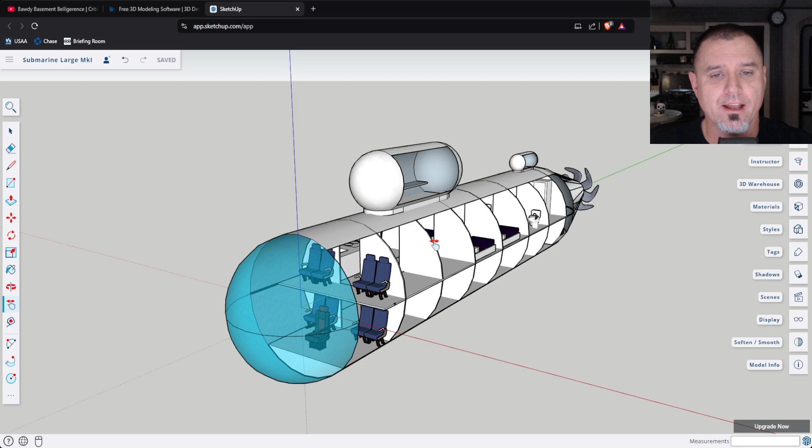Okay, so my OCD apparently needed at least one more crack at this submarine yacht thing before I could let it go, mostly because even the Mark II iteration that we went over in the last video has the problem of just not having enough width along the widest part, or even any part really, to make it to where you can walk up and down the length of the submarine without issues. The original version has a hallway along the side with rooms on that side, providing enough room for minimal cabins, but then you have this curving edge up here.

So I decided that rather than going with a 10-foot diameter pressure vessel, bumping it up to 15 would give me enough room to create a corridor going down the middle, and we'd be able to have enough room for some individual rooms here, and a captain's cabin towards the back. Increasing the diameter this way also increases the diameter that way, so now we have a 2-floor design rather than a single-floor design.

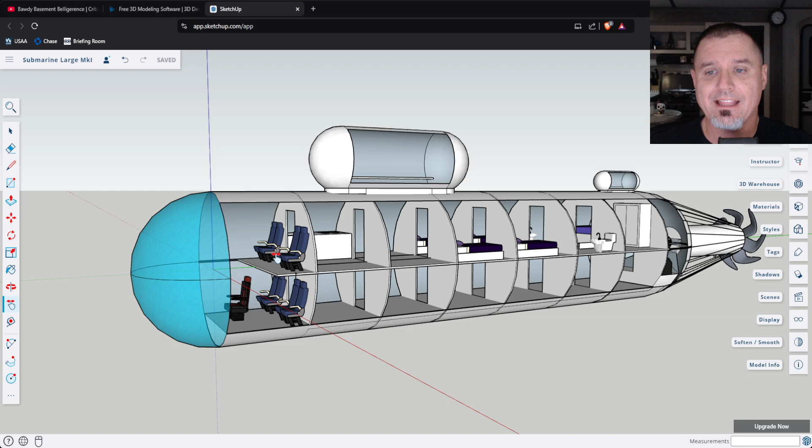The pilot would sit here so they have the best view to make sure they're driving and not hitting anything, and then plenty of seating back over here. Obviously if you wanted to put a couple small seats right here for people who want to sit up close towards the front to see everything, that'd be fine. Little kitchen area here.

I didn't go through trying to pay super attention to detail on things, I just wanted to give a better idea. You can see in the previous version a better idea of what I was going for in terms of attention to detail, especially when it came to systems and things like that.

So we have a kitchen right here, you'd have whatever you need in there. This would be a wet dry area where you come into and out of the sub from here. So this, you would have whatever storage you would need to be able to take things out of the sub and back into the sub, kind of things like that.

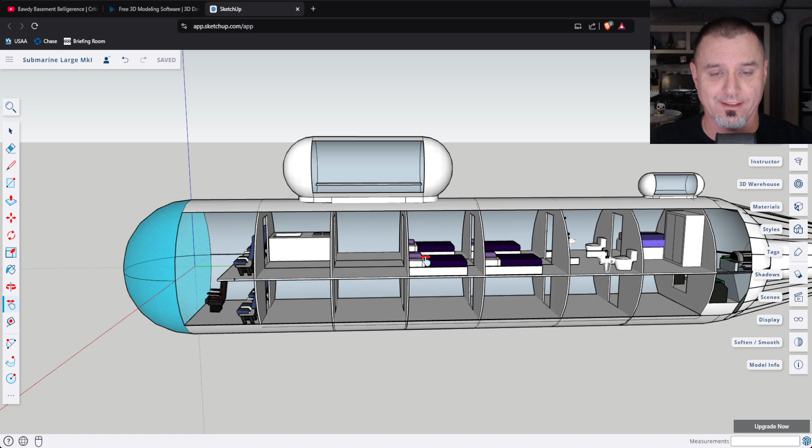For individual crew or kid bedrooms, or whatever - if you're running this as a yacht it would be family members' rooms, if you're running it as a research vessel it would be individual crew rooms. This right here is a dual bathroom setup.

These are meant to represent walls, they go up and over, and then there would be a door here. You'd be able to go to the bathroom, use a sink, use a shower. This could obviously be rearranged - this is just a quick little half-assed thing to give everybody an idea of what I'm going for. Obviously you want people to be able to walk through without disturbing people trying to use the bathroom and take a shower, so while I'd like to have one big shower, maybe you can make this all one big shower area and then have a couple stalls over here for the bathroom. You could figure it out if you were going to get serious about engineering something like this.

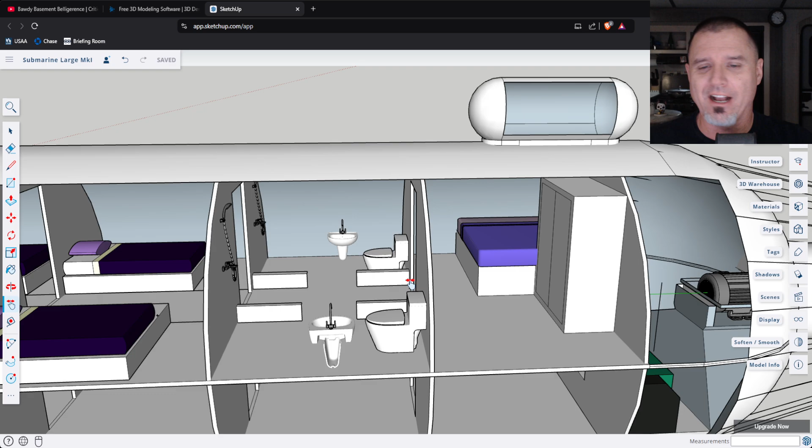This is just a quick little thing I put together to get the idea of what I have in my head here. Captain's bedroom with a queen-size bed, big storage cabinet - there'd probably be a bunch of other stuff in here that you'd be able to do.

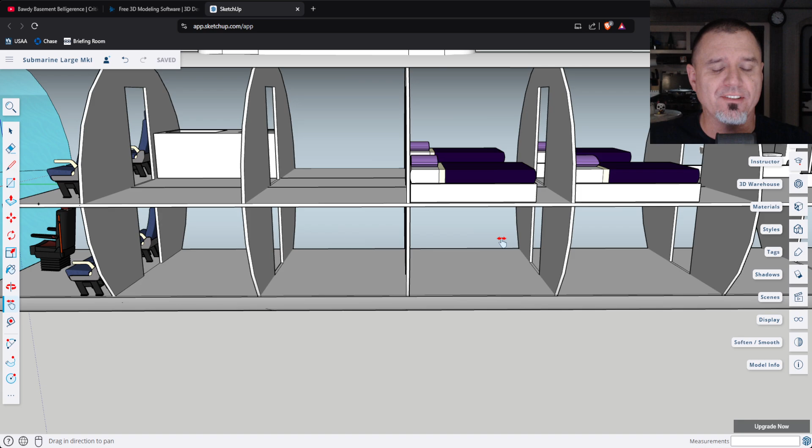All of the systems would be down in the very bottom of the submarine, and also up into this second level here, which would be mostly a mechanical area with all the different systems the sub would need - air handlers, ballast tanks, any pumps and stuff, batteries - lots and lots of battery storage, because you're going to need lots and lots of batteries for that.

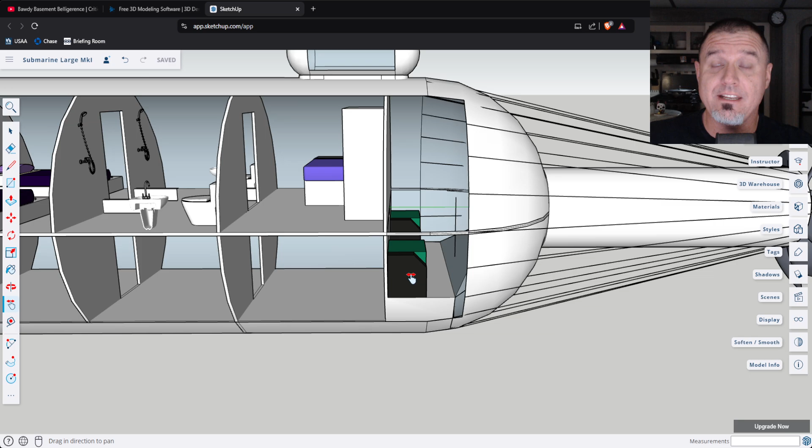Everything in this second level, it doesn't even have full standing headroom in here, so you wouldn't really want to be using the space too much anyway. You'd just have a lot of mechanical and other equipment that you might need for the sub - dual diesel generators to make power for the batteries and also to run the electric motor here.

For the gentleman who has an interest in this particular idea, this is what I wanted to have on the previous 2 iterations of this, but you can see it clips through the pressure vessel here. So that's why you were supposed to visualize that this was here, and that's why there was a flat wall there - because at the end of the sub, you need to have some kind of way to taper off the water flow so that it doesn't just stop right here.

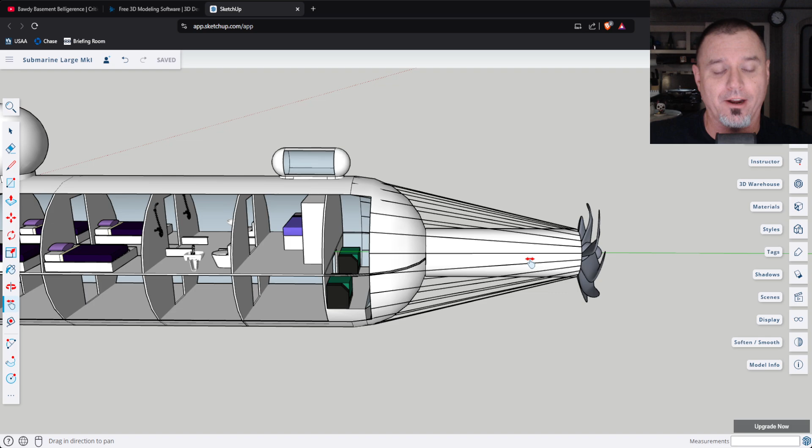So yeah, that's it for that. Obviously the big propeller in the back. I think I'd like to have one that has a shroud on the end just for safety, since this is going to be a pleasure craft, and if people are going to go swimming around it, you'd like to protect them from the sharp edges there.

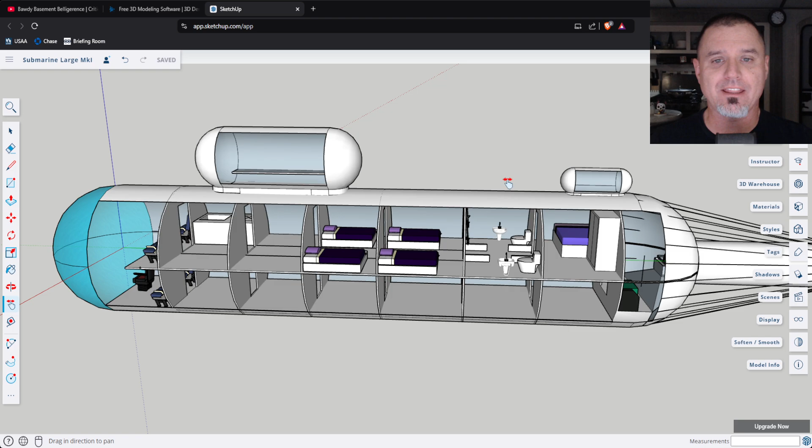If you want to see the purpose of these here, I go over them in detail. This is basically an elevator to take you up to the surface so you can park on the bottom, and this is a floating buoy kind of thing that will have a snorkel on the top that you'll drag up behind you when you're traveling underwater, to allow you to power the engines while you're submerged rather than having to stay on the top.

I don't think there's anything else. If you want more information about the concept in general, I have two previous videos that go into depth as to why this exists in my mind and why I've laid it out the way I have. Be sure to go watch those if you're interested.

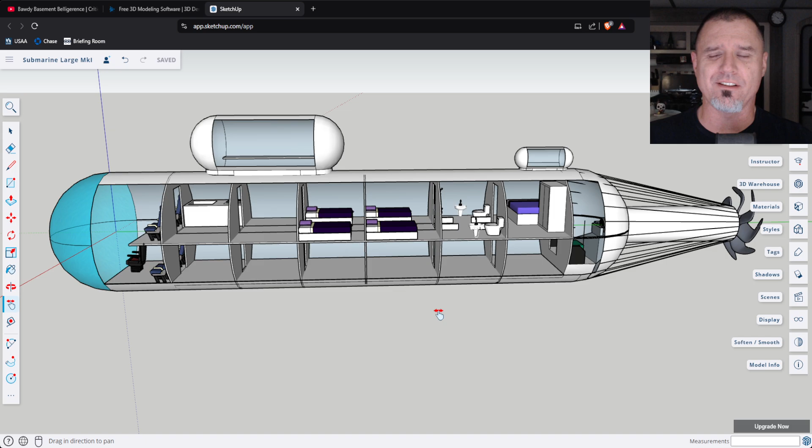But yeah, my brain just wouldn't leave the fact that there was no good walkway. Now this design here is really starting to- this is about half the size of a standard size nuclear submarine, so we're starting to get up into, this is kind of ridiculous.

I mean, it was ridiculous in the first place, just the idea of it is ridiculous. But now we're getting to the size scale where we're starting to get about as wide- like the Los Angeles class submarine is 33 feet wide, and this is 15. So we're starting to get kind of ridiculous with it.

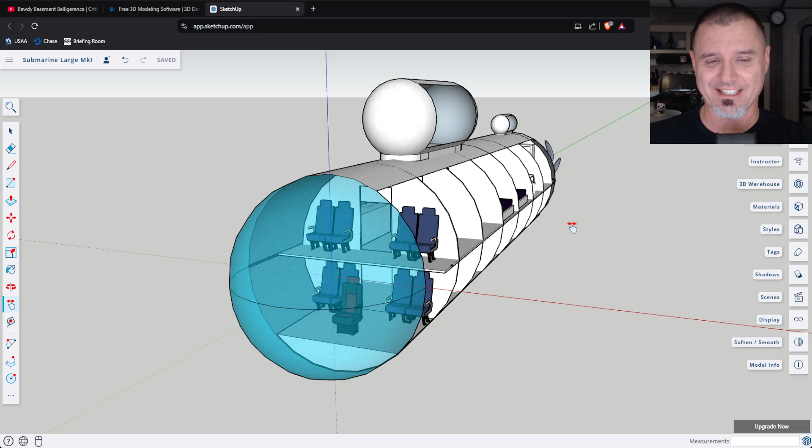And then the length from stem to stern here is about 92 feet, I think, something like that. So yeah, it's starting to get a little bit ridiculous.

I think if you wanted to save a lot of money, you could probably cut out these two sections here, pull everything forward, move this forward, and that would take off a good 16 to 20 feet, depending on- you know, I wasn't super precise with putting the bulkheads out.

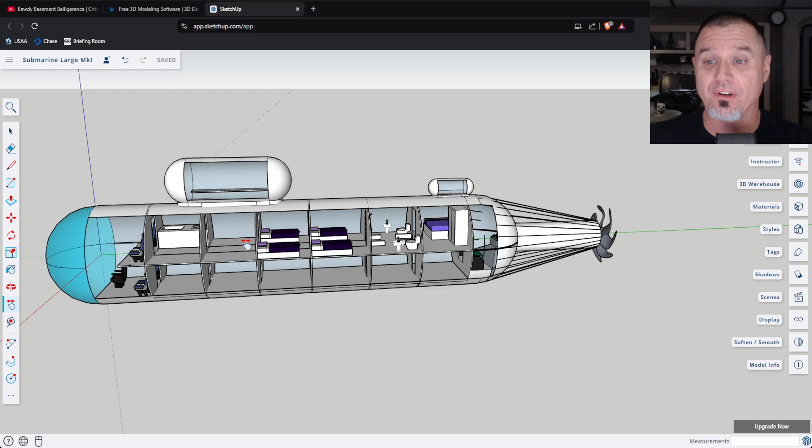And then for engineering concerns, obviously too much space between the bulkheads causes some structural stability issues here. You would put some stiffening rings in some of these more open spaces to help with resisting pressure.

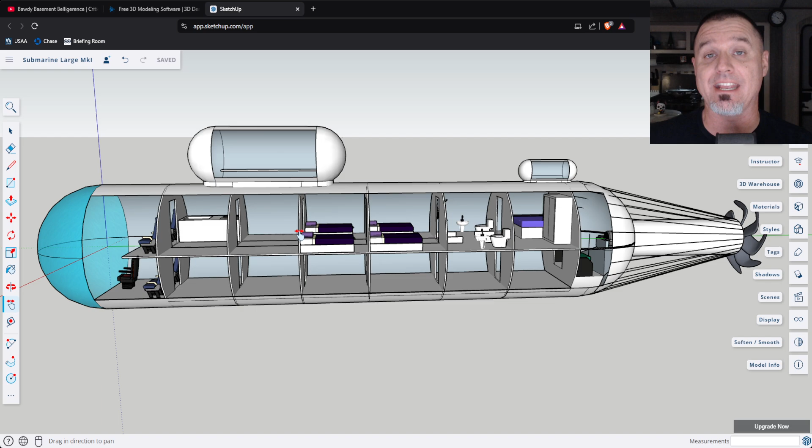Obviously, if I had the money to actually push forward on something like this, I would have an engineer take this concept and this idea that I have and turn it into something that would work in the real world. I don't have the knowledge or the expertise or even the fundamentals of engineering to know what this needs and any of that stuff. I have the concept in my head. Somebody who actually knows what they're doing would have to convert it into something that could be built.

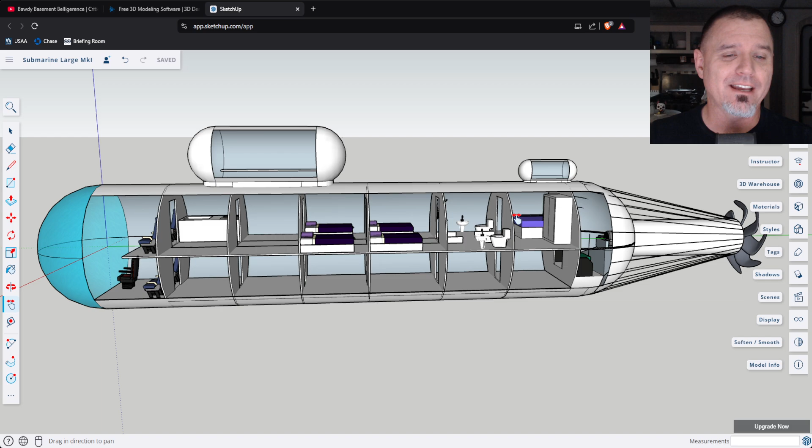But yeah, this is hopefully my final version of my submarine yacht design that is intended to be able to travel. I mean, honestly, bigger means more fuel, which means you probably have a longer range. So this might also address the diesel fuel issue, because you could have a crap ton of fuel tanks in here in something this big.

So bigger might actually be more practical in this case, rather than trying to go for something that's smaller. Hard to know. But it is what it is.

Anyways, yeah, hopefully this is my last version of this. Like I said in the last video, I'm one of those people that I have to get it out into the world before I can just get it out of my head and hopefully let it go. But yeah, this is it.